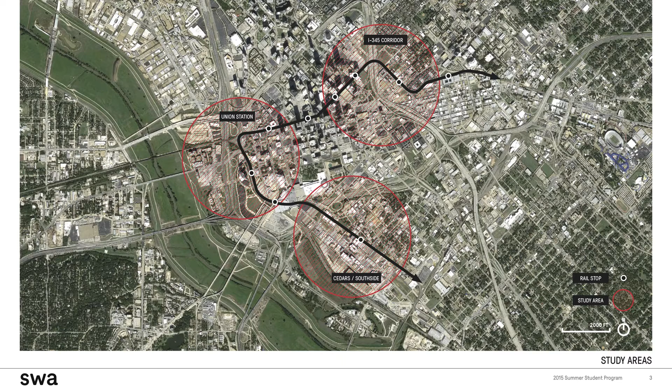Just as a means of introduction to the process, for those of you who aren't aware, we assigned very early on to the students 3 specific sites: the I-345 area, the Union Station area, and Cedars. We asked the students, whether individually or in groups, to really take a look at these sites and understand the physical form, the culture of the place, and some of the sociological, political, financial, economic, and environmental issues of these places.

They began their first week by looking at the city's comprehensive plan, and the second week working in groups to try to apply some of the ideas and thoughts as to what the city could be based on these particular sites.

Then we asked them for weeks 3 and 4 to actually develop a big idea and project this into 100 years or more into the future, so that they could really begin to understand what a 22nd century city might be. And that city for them to study is Dallas, but the idea is that they take away these thoughts and apply this to the cities in which they will be living in over the course of their professional careers.

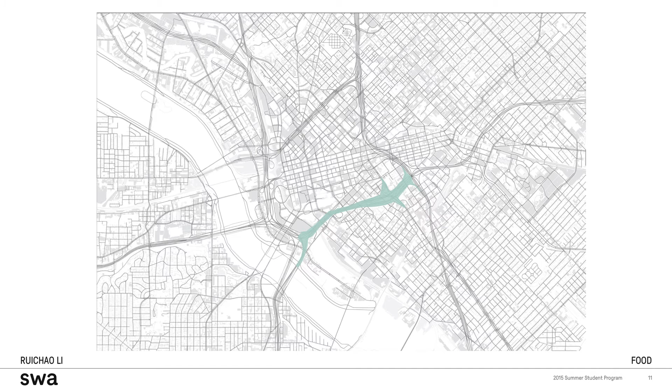So the new proposal is going to create a green infrastructure and move the existing vehicle lanes underground to create a space for food production and for dealing with storm water management as well. Let's zoom into the site.

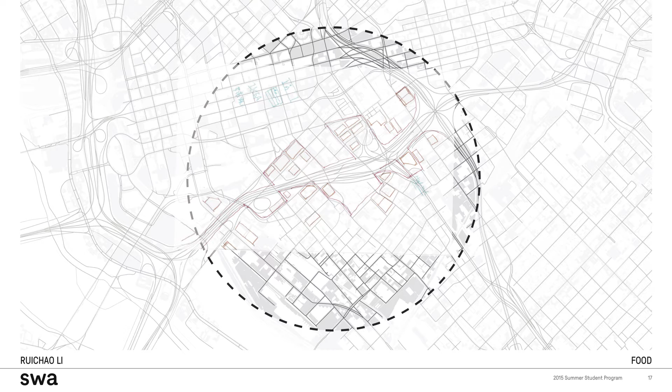In the neighborhood, the important buildings need to be considered, and some existing road systems should be kept to connect the two sites. A linear space will be created to form a green corridor. Underutilized spaces, such as some surface parking lots, will be used for food production, and a water system will come into being.

So here is the existing plan now, and this is the proposal in the future — before and after.

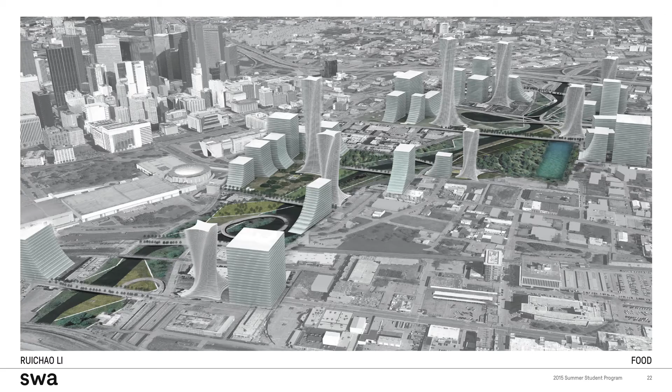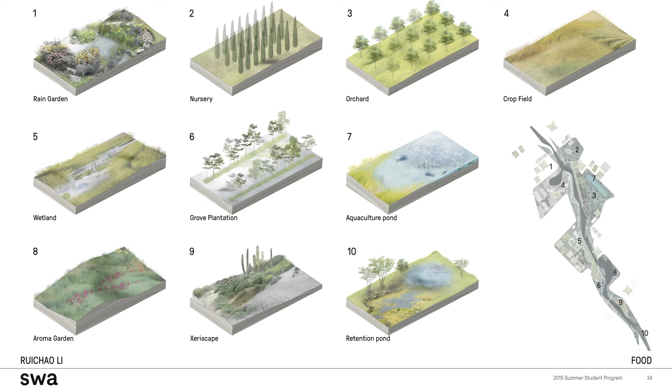So basically there are two elements in the food system. The first one is an agricultural park. Different plantation methods happen here. It's basically a natural museum to show how traditional agriculture works.

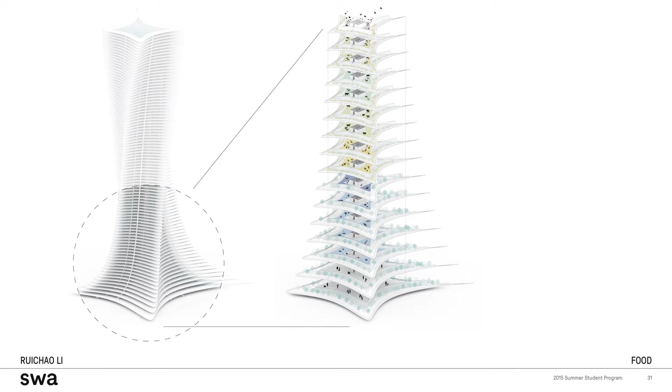At the bottom of the buildings, there will be some orchard on the balcony, aquaculture inside, and cattle and poultry raised here as well. At the top of the buildings, there will be a rainwater collecting system, and wind energy is going to be utilized to make electricity to support the whole building, like to produce the vegetation.

And there's another type of building which is mixed use, with some commercial and residential space, as well as some open space on the roof. There will be some skywalks connecting these buildings so people have access to them, and high technology methods to promote production efficiency and save space as well.

So let's embrace the future — I think it's a win-win strategy for both food production and urban life in the 22nd century. That's it, thank you.

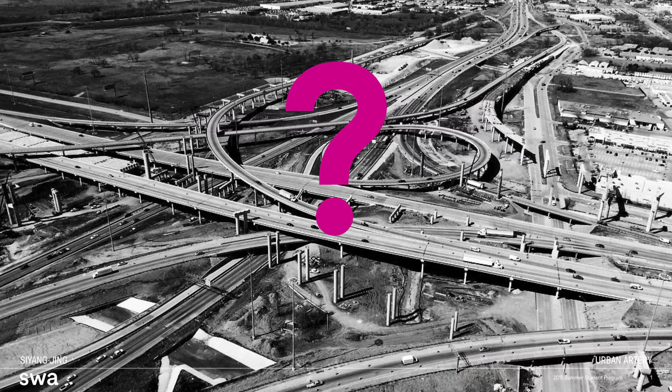My project is Urban Artery, exploring what Dallas will be like in 100 years. My big picture of the future is that land will be extremely limited, and it's a global issue. For Dallas, the transportation corridor is redundant.

Maybe in the future, people won't rely heavily on individual cars, but use more flexible transportation systems, so the areas of the transportation corridor are not of so much use. As you can see, in the existing condition, the transportation corridor contains a huge space, and it's inefficient. But it's an important network that can be the backbone of the city of Dallas.

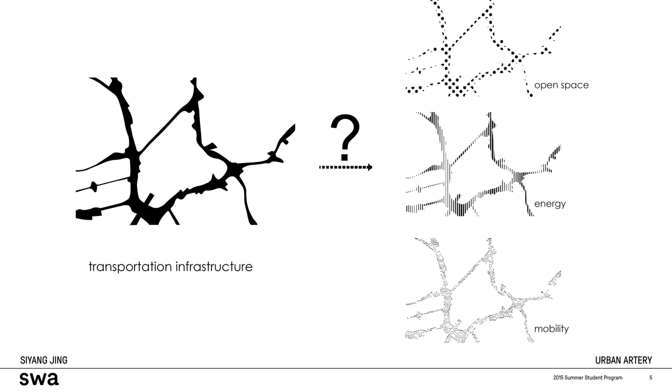So what if we transform this transportation corridor into something totally different that can provide open space, energy, and mobility? Maybe in the future, this corridor is not anymore a barrier, but a soft and social infrastructure that can provide many activities and amenities inside.

So people can, it moves people and touches people. It's like an urban artery that provides the things the city needs to the organs and heart of the city. I see it as providing everything people need in the future of the city.

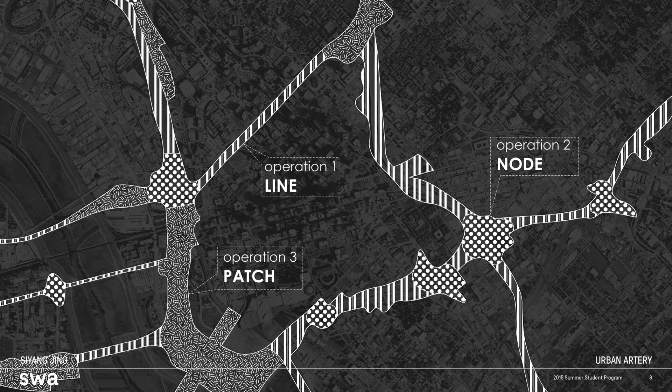Based on the urban artery idea, I categorize the corridor into 3 different operations. Operation 1, line, is kind of a linear area. Node is defined by the intersections. And patch is a thick belt that occupies a lot of area.

Based on those, I'll explain what exactly each operation is. Line is a kinetic system of people, animals, and traffic, and also the distribution of goods, nutrients, and energy.

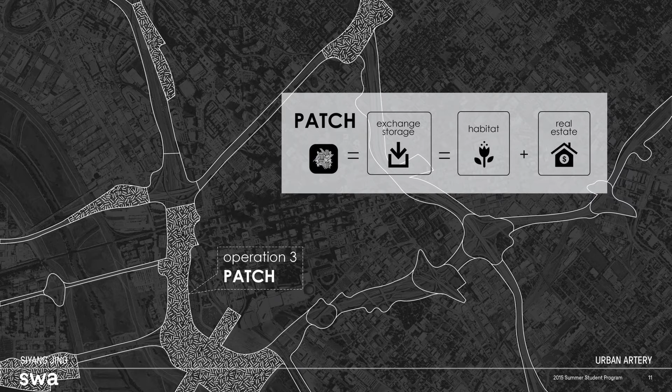Node is a center that congregates all the flows, and it's an area for material processing and energy production. Patch is a thick belt, an area where people can live, work, and have fun, where animal habitats are created and food is cultivated.

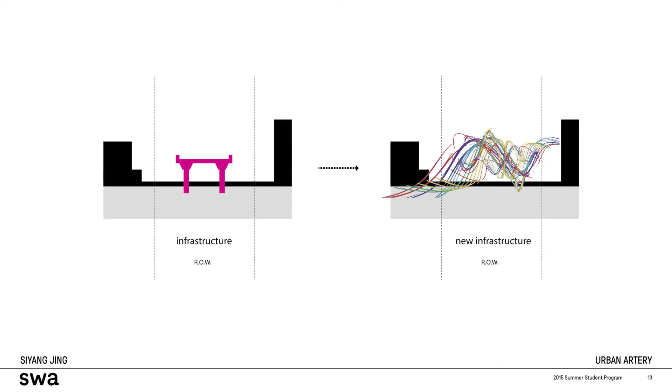I chose 3 typical sites to employ the specific operations, as a physical study of how to transform the freeway infrastructure into new infrastructure and produce spaces within the 3 operations of the site: line, node, and patch.

This is the operation matrix showing how every 2 elements combine with each other, and this is how it looks in 3 dimensions. I'll show them one by one.

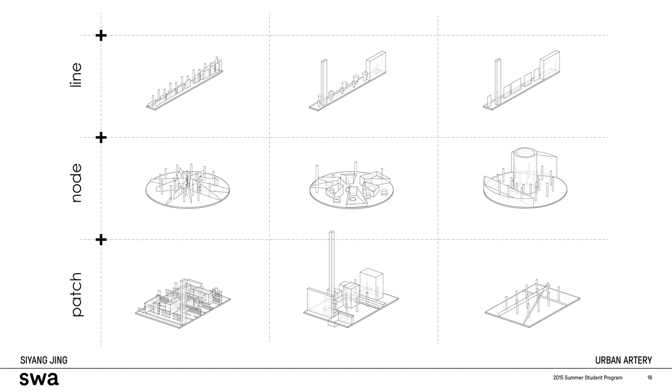This is the line operation, showing the energy distributions within it, and animal migration.

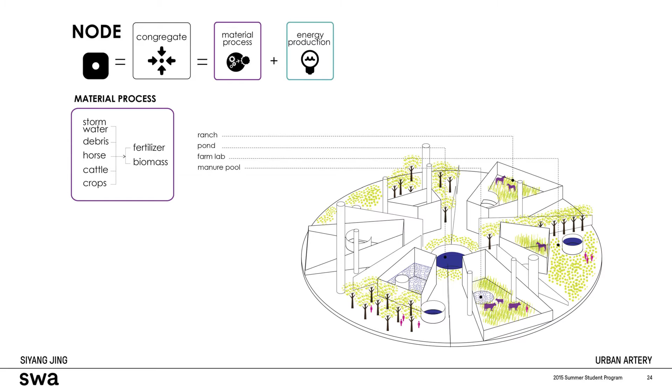And this is operation node, showing material processing and energy production.

And the patch, showing real estate and the habitat.

Because of the importance of open space for people's living environment, the main pedestrian level can be changed to provide various ratios of open space as needed. In the future, this system is flexible and can spur adjacent development. It's a self-sufficient, balanced system.

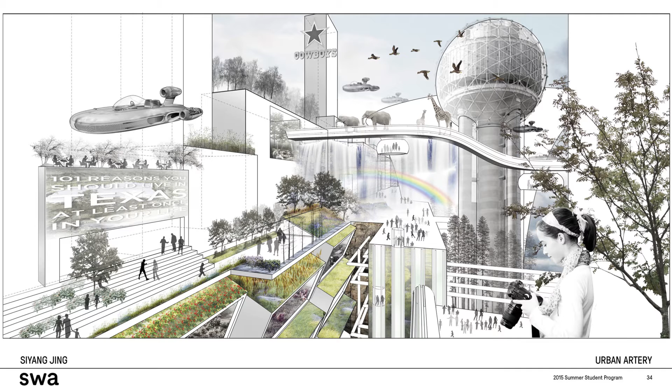This is what the urban artery looks like in the future, and as you can tell, this is the Reunion Tower on the side. So it is functional, but not a dry blanket with futuristic machines.

There are migration corridors here for elephants and giraffes. There are habitats and efficient transportation here, and people can live inside, and it also produces food and energy.

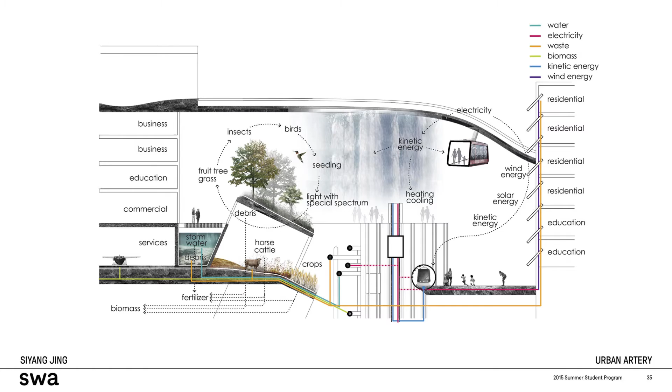This is how the system works, the nutrient flows and energy flows. Over the years, the system takes root and grows into the existing urban fabric.

It is a totally different system, with different mass, scale, form, character, and land use compared to what we know as Dallas today.

So this urban artery is not an independent system, but it's contextually relevant. It has a symbiotic relationship with the heart and organs of the city, and this new connection will play an important role in rebuilding the urban skeleton, adding biodiversity, and enriching people's lives in the future.

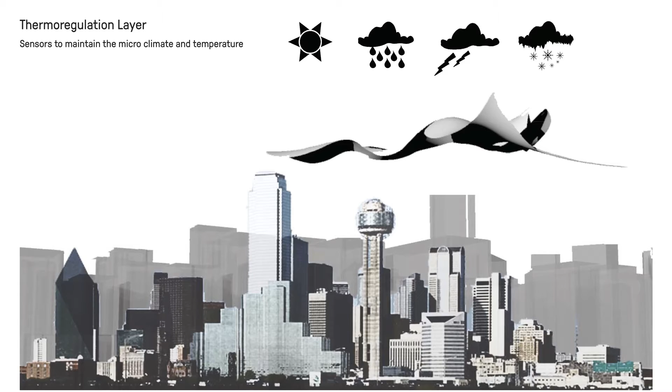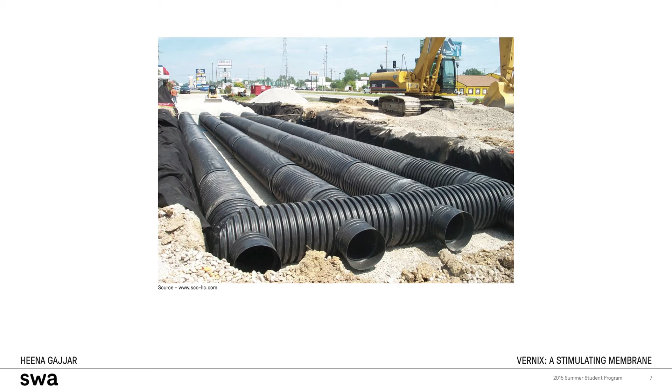This is the infrastructure of energy production today. So again, asking the question, can we bring the synthesis layer to the city, which takes sun, wind, and the natural resources we have, and creates energy for the future. This is the infrastructure of stormwater management, where we collect water in the system and allow it to flow away. So can we have this new storage layer which captures rainwater as well as creates water from humidity, and allows us to use this as a resource?

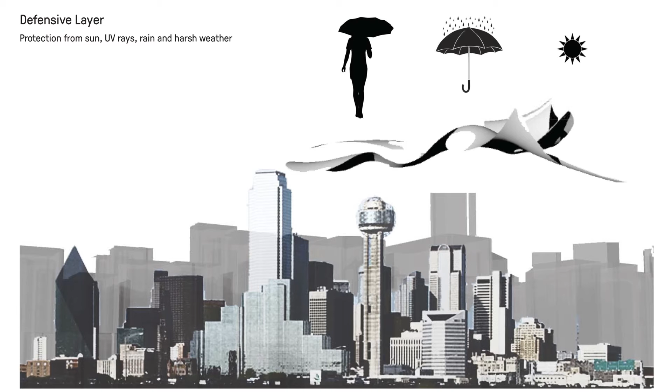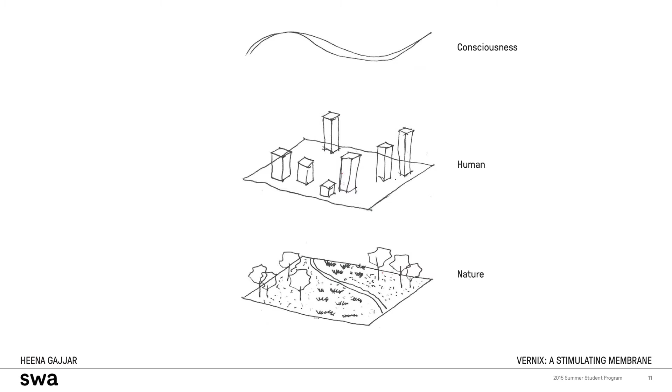And last but not least, the negative impacts of sun, which will of course increase with time. So can we have this defensive layer which protects us from ultraviolet and other harmful radiations we will face in future? So basically, understanding this new matrix where we have nature, then our cities as a human intervention, and then asking, can we have this layer of consciousness which is very similar to human skin? So it's a defensive layer, a thermoregulative layer, as well as a synthesis layer, pretty much similar to what our human skin does.

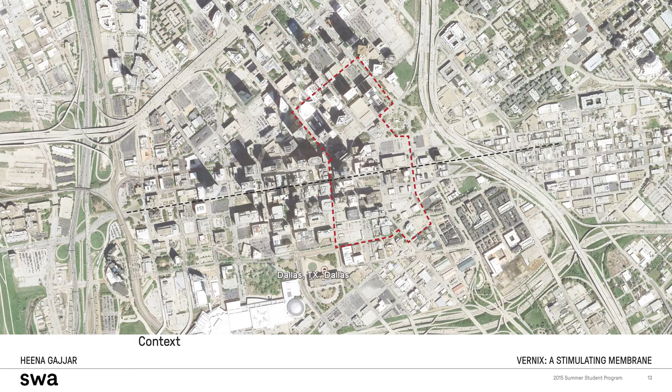In terms of context, I chose my site in the heart of downtown. It's an area with a lot of parking lots, where I envision new buildings coming up. And again, taking the assumption that we are converting the main street into a pedestrian street, which connects downtown with Deep Ellum.

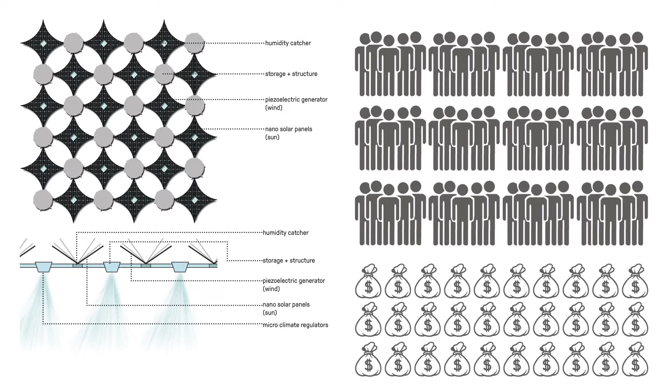In terms of going into detail how the skin would function, it has all these aspects of humidity catcher, storage and structure, using wind and sun, and creating this layer. Basically, this is building a new public-private relationship where private dollars are invested in creating and maintaining the skin, but it is applied to these open spaces—in the public realm, basically.

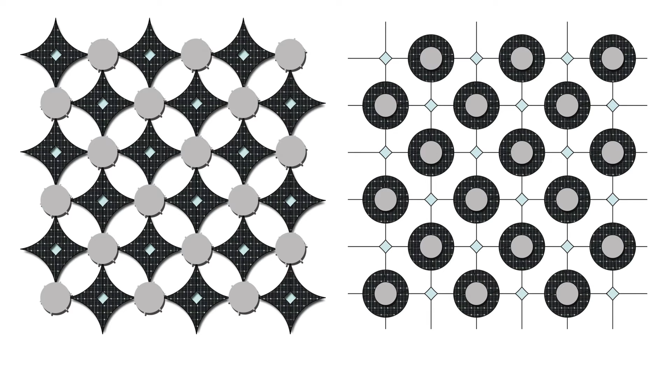Going to understand the pattern of the module—this is the individual module, which looks like this, and when it is closed at night, it looks like that. It's inspired by the Hoberman switch pitch ball. So during the day it would be like this, and during night it would be something like that. Because this is a dynamic skin, not necessarily the whole skin needs to function in terms of all three given functions—so some part of the skin would function differently during some part of the day.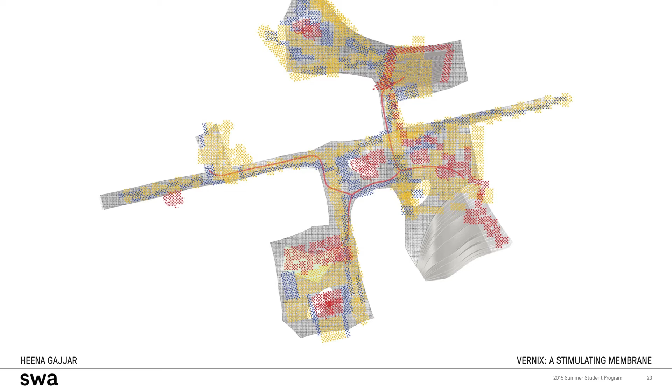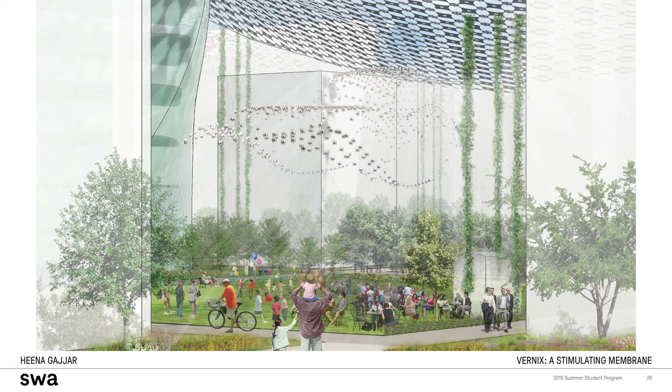So this is what the insertion of the skin in this urban infrastructure would look like, where new buildings come up with their landscape on top, while the skin integrates and becomes the building which merges into the landscape, and the landscape grows over the skin connecting into these spaces. This shows the view of how the building looks and merges with the skin and landscape, and this is what it would be like to be under the skin. So basically, it connects people and brings energy, everything into one place, collaborating them all together.

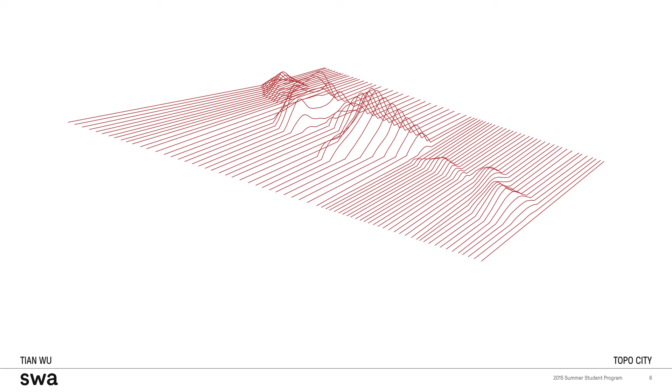This is the existing water drain system. I tried to analyze it and create a new stream water system, making the stream water system flow more consistently. I overlaid the existing street grid to get these new shape forms, which bring in the surrounding conditions and a connection to the city.

This also gives additional function to the building construction, such as solar panels to collect solar energy, green roofs that can capture and filter water, and courtyards that can capture skylight—plus vertical, mixed use of the building for different types of programs.

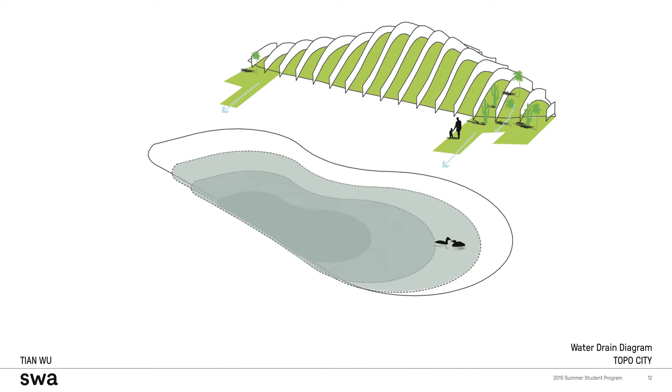These diagrams show how the water drains through the terrace structure and eventually goes down to the low point, making its own way to the river. This section shows a comparison of the dynamic way this compares to current Dallas.

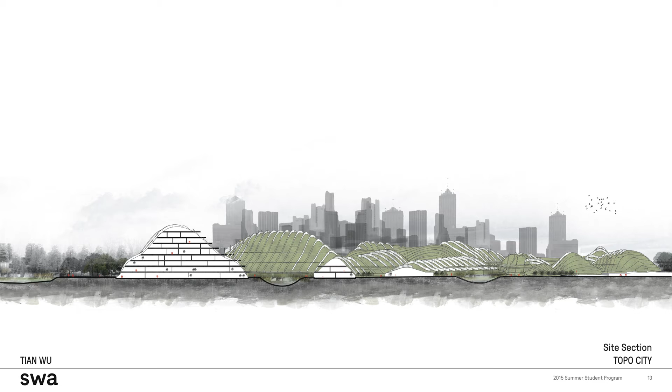So this experience, when people walk through this site, they can have a very different view of the city, and also have the view to the river. So I've created this very strong visual and physical connection between the city and the river. And also the green roof can create a very natural sense for the future residents who live there.

And also, like the diagram shows, how the structure captures the water and reuses it for daily life. And in the daytime, how they keep capturing green energy.

So I think I created this new form to redefine how landscape architecture looks in the 22nd century, and to create this very livable environment for people. Yes, thank you.

Arturo: All right, this is an area of town that we've been doing a lot of work in over the last couple of years, trying to reimagine the rebirth of the Cedars. The Cedars at one point was a very vibrant community that got displaced over the years by industrial uses.

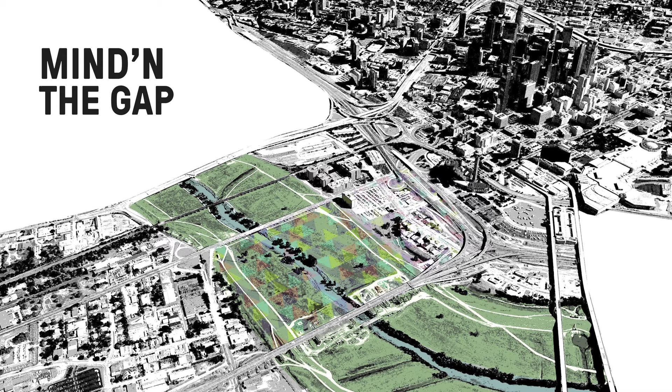The 22nd century will obviously be formed by things that we have done in the past and things we're doing today. A lot of trends we're seeing today are increased development in downtown and especially in the districts around downtown, including West Dallas. So in the near future, Dallas will definitely be mindful of the gap when they think about developing that area.

So in the 22nd century, Dallas will address the riverfront as a development opportunity and transform it into the epicenter of a new downtown. By taking the riverfront, and instead of building to it, building through it, we can connect two different places and make it potentially a new downtown area, maybe the first of its kind for Dallas.

This area will also be a synergy of the built and natural environment, because in the future places won't just serve one purpose—it'll be a culmination of multiple uses happening at once. So the riverfront will no longer just be an open park space; it'll also be an urban living environment for people to live and work there.

So here is the context of Dallas. We all know this, the freeway system. Being an outsider coming into this city, it's very obvious that Dallas is a car-oriented city, and this is one of the major connections that connects people throughout Dallas. You can see in the center here that the core of downtown is bound by the freeway system.

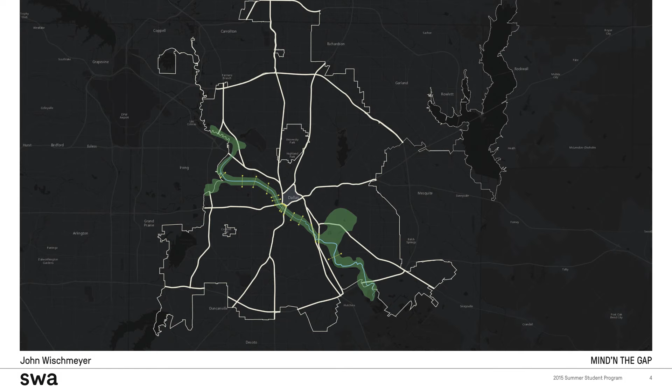But something people don't think about too much is the Trinity River corridor system that runs through Dallas as well. This is going to be a huge amenity in the future that we're maybe not thinking about so much today. These yellow lines are the links that connect both sides of the corridor. This idea reinforces the notion that the corridor is something to just go over or pass over, not really spend any time in or give much thought to.

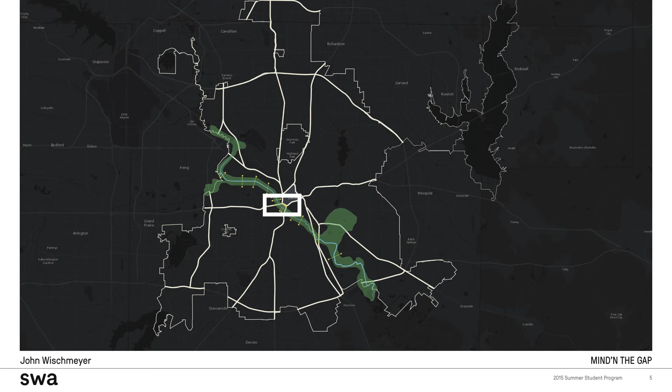Right here towards the urban core, we can see that there are multiple connections. So this is a curious spot, and I wanted to look further into connecting an area in this zone.

So here we have present-day Dallas. We can see the freeway system binding, encircling the downtown. It's disconnected from the riverfront, and it also speaks to how we think about development at the riverfront today. Here we have a jail, we have surface parking, and we have the freeway system. So the riverfront is really not a place that is desirable for development today, but I think in the future it will be.

So in the next 50 years, a lot of development is going to happen. We're going to have better technology. We're going to have developers who want to get a lot of things built. And in Dallas, there seems to be unrestricted building codes, so a lot can happen in a little amount of time.

And so we're going to see the downtown creep closer and closer to the riverfront. And we're also going to see West Dallas get closer and closer to the riverfront. But what's important is the space in between these two areas, the riverfront.

I'm also imagining that in the future, because of all of this increased development, that Dallas will probably implement a growth boundary. This line you see right here is what I'm imagining to be the new growth boundary so that Dallas can expand. But I don't see it expanding around here. I see it expanding further away because that land is easier to develop.

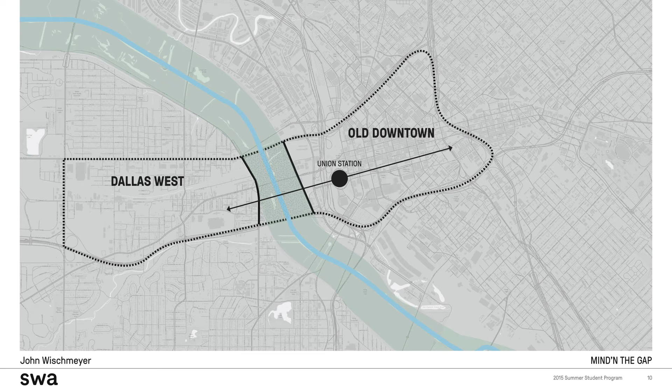Also in the future, Union Station is probably going to be a really important node in Dallas. It's predicted that it will be the station for high-speed rail, bringing people from out of state, from other cities, and even maybe a central point for people who commute through Dallas. Having this node on axis with this portion of the riverfront, I feel is very important.

And so this is why I'm looking at this area for potential development. To achieve this, I'm looking at 5 strategies. The first is to re-engineer the Trinity River, which will in turn shape how the topography and land form around it. Looking at different building typologies, creating open space, and then connecting all of this from West Dallas to downtown and through the riverfront.

So this is what we have today. As many of you know, the river was engineered to look like this. It was moved about a mile from its original location, and it's primarily serving a function. It's not so great to look at, and it's really not, from my experience, highly used.

So I did a study of looking at natural river meanders and just looking at the spaces and shapes that forming the land differently can give us. And so this is an idea that I came up with. This could be potentially the new Trinity River that runs through the riverfront next to downtown.

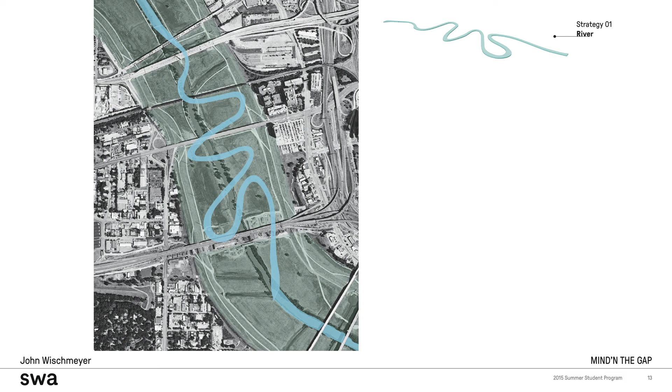And so looking at these curves, I decided that the land should be more dynamic. By pushing and pulling the land to create landforms, the gray forms are brought up to reinforce the natural curve of the river, and the dark gray are depressions so that in flooding events they could potentially become wetlands and future park space.

Looking at building typologies, in this scenario the typologies are formed by the land they're in. Buildings in the depression areas would deal with water and other natural events a certain way, so they'd all have a certain form, and buildings on higher land would follow the same logic with a different form.

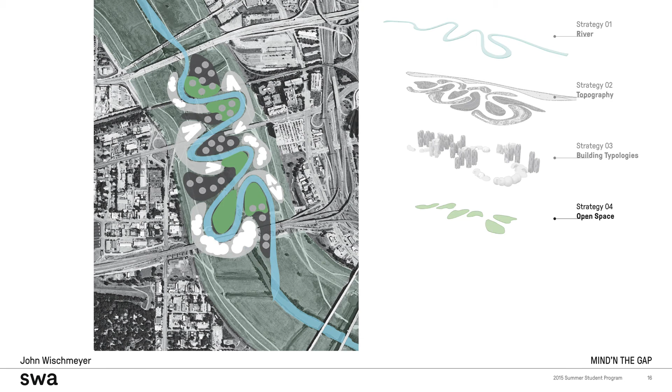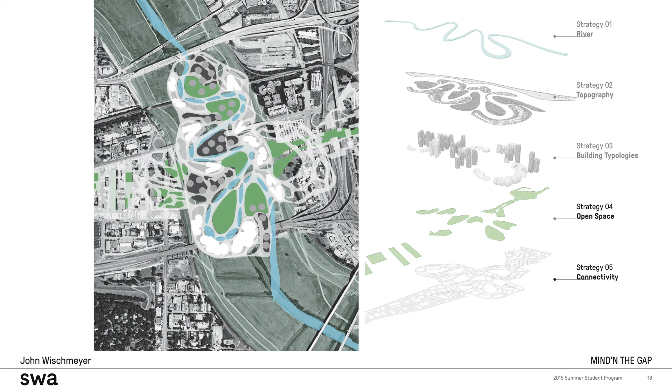Then creating a connected park space that runs through the center of this system, and connecting everything with a surface I'm calling the people plane, which connects downtown and West Dallas through the riverfront on a pedestrian-only plane. It connects the buildings and both sides of the river, allowing people access down to the riverfront, but it's not just about the riverfront, it's about connecting these two systems, so the park space and pedestrian plane finger out into both sides.

Looking at this in section, we see this stretch of riverfront between West Dallas and what I'm calling Old Downtown is about a half mile of flat open space. During flooding events the water rises and it's very functional, people can still cross using the multiple bridges we have. But my proposal drastically changes this topography, giving people a wider variety of ways to interact with the riverfront while staying connected, so that during flooding events this space is still activated by this plane.

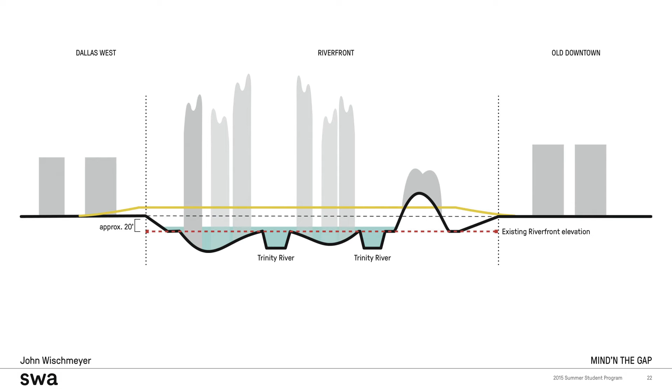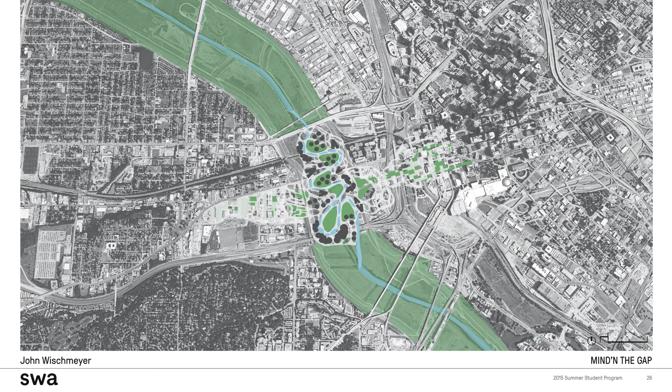Looking at a site plan, we have this proposed site connecting the corridor, linking to both sides of the river. Thank you for minding the gap—this square here is about half a mile by half a mile, a fairly small space, but it shows that even a small area in the future could make a really big change for the way people live in Dallas. Thank you.

I want to start by saying I really like all the information you gave leading up to the reason why you chose this site. You have a really clear visual aesthetic that distills down the information to help tell your story incredibly well, so much so that looking at your perspectives and drawings I'm starting to see Dallas in a slightly different light, which is quite impressive.

I really like that you chose the river bottom itself, because intuition would say no, you wouldn't build on the river, it's a natural resource. But I think there's also this reality that the potential of growth and expansion will require us to have some plan of action for developing everywhere.

I think you've done quite a nice and sensitive job—yes, you're re-engineering something that's already been re-engineered, but you're building in parks and engagement at the human level across multiple sectional scales and buildings. I think it gives the correct mindset for planning ahead for the future. And it's different—everything is curving, all the buildings are curving, and it is a bit visionary. It's not just downtown sweeping over a river and leaving it behind; it's truly a nice integration of what both our natural and built landscapes could look like. So well done.

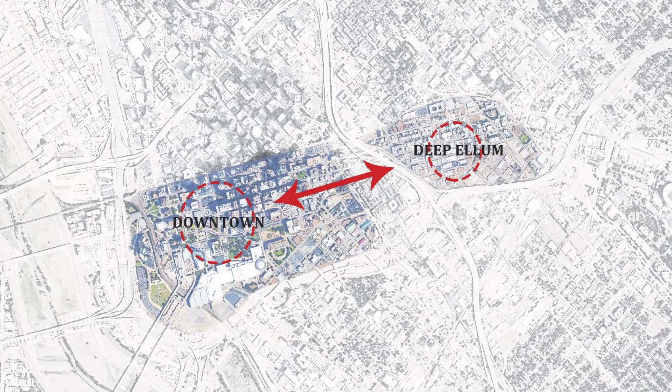My project name is Healing Web, and I'll tell you later why. So first of all, the starting point is to connect the city, and more important is to connect downtown to Deep Ellum, because I strongly believe that downtown will expand towards Deep Ellum in terms of following the existing grid. And what is preventing this? Scars. With scars, I mean the wounds left by this car-centric era in the last 100 years. And the point is how we're going to heal the wounds left by this.

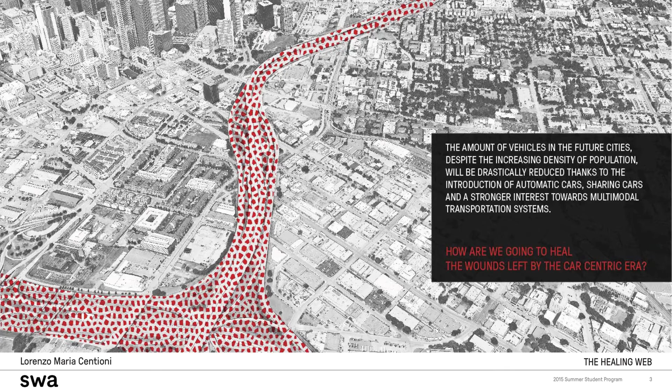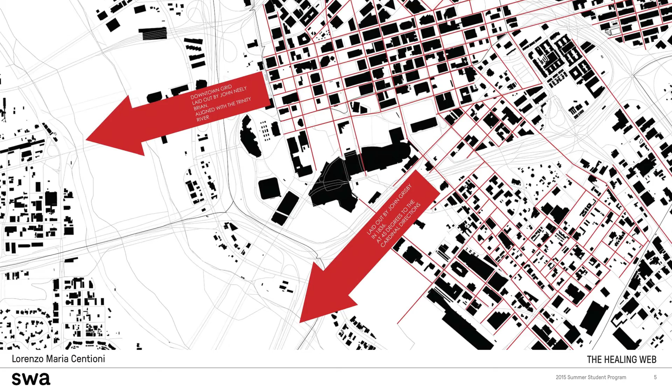Probably that could be taking advantage of the existing space left by the previous planning. With this, I really mean the highway, so the space left by the highway, which is not utilized at all now. So the area of focus is this area here, which I think is really important because it's the central point of these two existing grids. I don't know if you can read here, but this grid here is the one aligned with the Trinity River, and this grid here is from 1836 and is 45 degrees with the cardinal direction. So this point here is a really messy point in terms of urban design and street layout.

So this is my impression as a European student of downtown here. What I would say is that, of course, there's few people along the streets, not enough tree lines, green spaces. It's an automobile-centric city, and there's a lack of entertainment, retail shops, bar clubs. Could the tunnel system be the right solution? In my opinion, I don't think so, but we will see. And then another feature is that there's a huge amount of car parking.

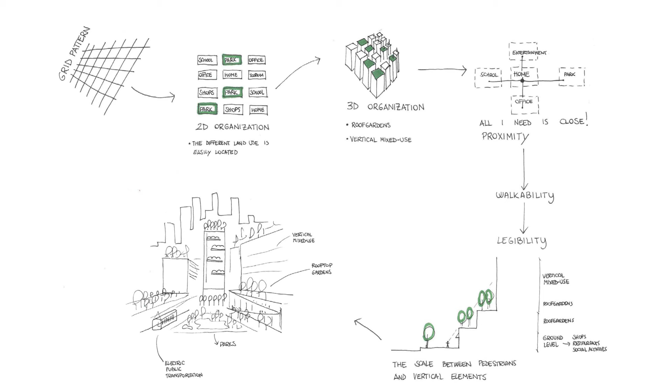Another interesting point for this area that made me choose this is that I strongly believe the grid pattern, the grid layout, is a really strong point for the future, because the grid was made like 100 years ago, and we still have it. So why not keep on having this layout? I'm talking about the streets. As you can see, what you can have is proximity, walkability, legibility, and this organization can also be three-dimensional. For example, parks can also be rooftop gardens, and you can duplicate this idea of having everything really close. So if this is home, you have park, office, entertainment, everything really close.

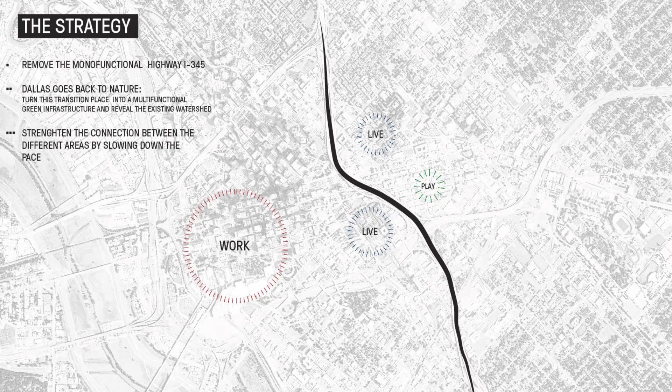The objectives, the main aim of this project, is to bring back people to downtown, and this can happen by bringing back green spaces, restaurants, retail shops, tourist attractions, and schools. The strategy is based on three main points. The first one is removing the highway I-345. The second one is that Dallas has to go back to nature, and that means I want to turn this transition place into a multifunctional green infrastructure.

And then the third point would be strengthen the connection between the different areas, slowing down the pace. So the first point, you might ask, where are you going to put all the cars in the future when the density will be much more than now?

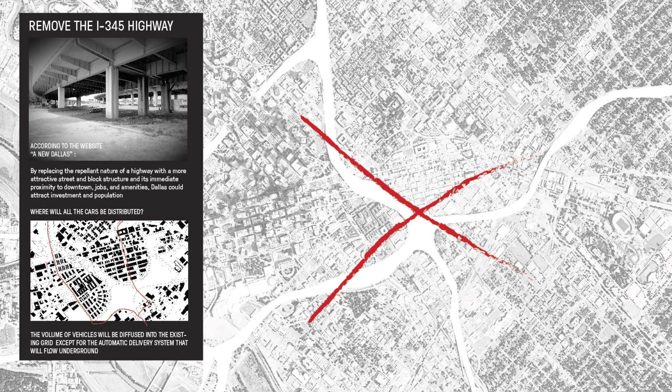So the idea is to diffuse the vehicle amount in the existing grid and also create some other streets that I will show you in a couple of slides. My assumption is that with automatic cars and sharing cars, the total amount of vehicles will be less than now.

Second point, as I said, Dallas has to go back to nature. When we made the second week group, we were talking about revealing the existing watershed, which is a natural low point of the land where Dallas is. By excavating this, we can create this low point and green infrastructure connected to the Trinity River watershed, which is really important.

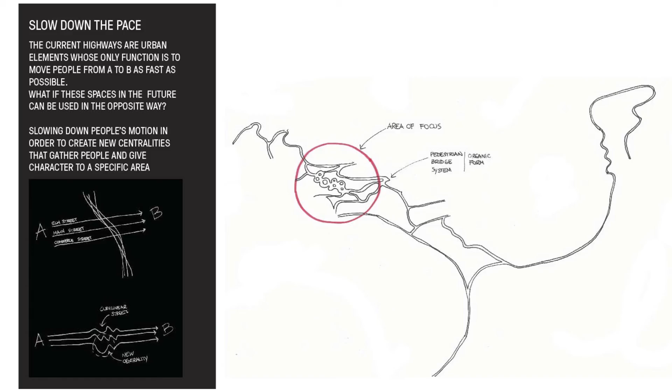Third point is slowing down the pace. That means now, for example, if I want to move from downtown to Deep Ellum, I just go through linear streets like Commerce Street, Main Street, and Elm Street. This is monofunctional, having just one function, connecting people, connecting A to B. So we are not caring about the space.

Assuming we can create some curvilinear streets that automatically create some kind of centralities, that's what I'm aiming for. And that's the plan view of the green infrastructure, but let's see it in detail.

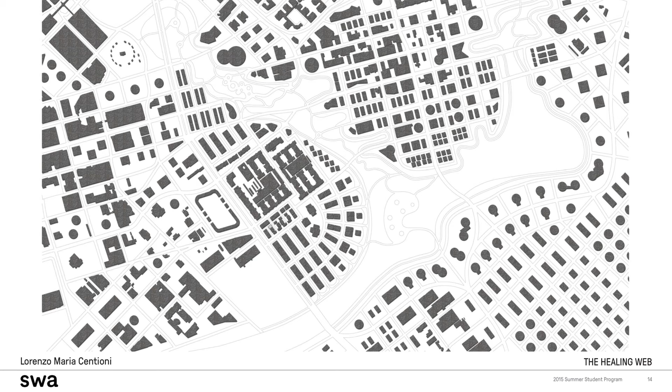This diagram is a map showing the difference between the built environment and the open space with streets included, and I shaped this new part of the city that didn't exist before. What's important is that before, the highway was disconnecting the city, and now this green infrastructure, substituting the highway, is actually creating land and giving form to the city.

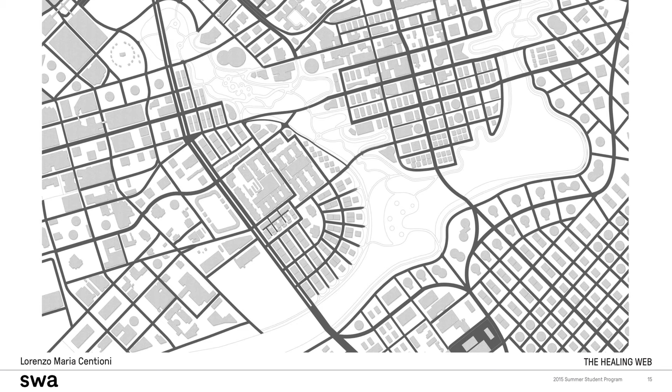And this is the street layout. If this is the previous track of the highway, the streets can now be something like this, connecting and diffusing the vehicles through the grid. So this is the lowest point of this green infrastructure.

As you can see, this is a little water stream, and the more I move, the more it goes up. For example, if we have floods here, this could be another layer with retaining ponds, creating other kinds of activities—this one here is the farmer's market. The last layer, the upper one, is just open spaces that really connect this green infrastructure into the existing city, into the existing grid.

Last but not least, this is the pedestrian web. You might think this green infrastructure could be something nice because it's green and blue, but it could actually disconnect the city. My idea is really that we have to connect people and create these new centralities with this web of connection and bridges.

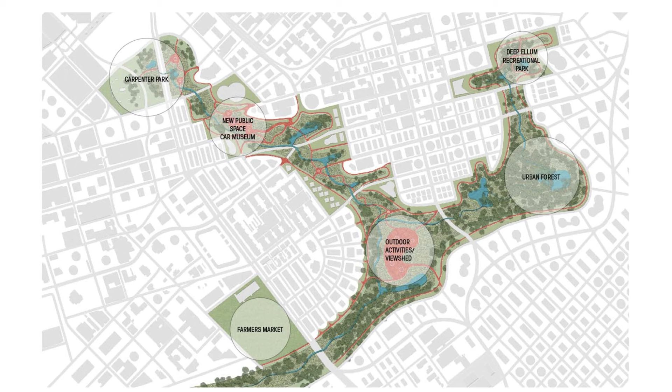And these are some activities. The idea was to connect Carpenter Park to Farmers Market. This could be, for example, an urban forest, and I'd like to have some kind of end point of this path that starts from downtown to Deep Ellum, so we could have some kind of recreational park there. This is going to be the area I will focus on in the next slides, which is this new public space.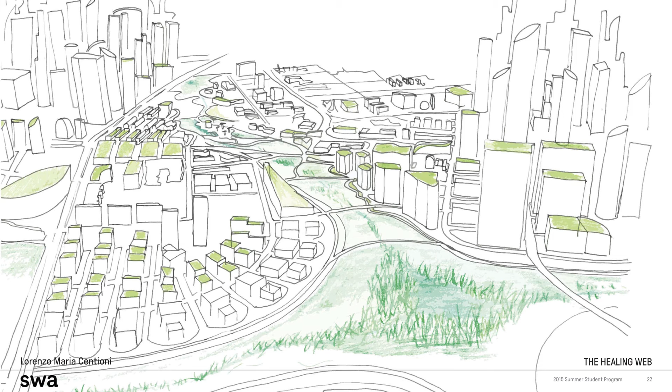And here's the render. Another feature is this new typology of building that steps back with green rooftops. For example, who lives here still has this kind of connection with the green infrastructure, so you don't have the view covered by another high building, but you have these green stairs that bring you visually down to the ground level.

And last but not least, I would say is to giving character to this area. So this is a sketch of the view of downtown, and this is the core area of this pedestrian web.

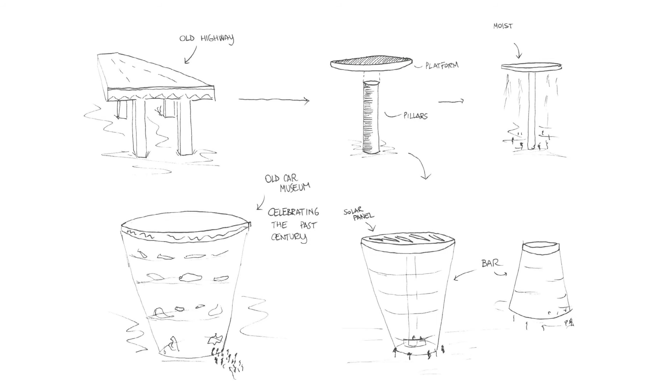Okay, so why not keeping some part of the highway, some portion of the highway to create some new urban design elements? For example, if this is the old highway, this could be some pillars, and we can apply some kind of platforms and create new elements. For example, this can provide some mist, or could be used with solar panels to have some bars, restaurants, and bring back some activities to the city.

And why not having an old car museum? So why not having cars in museums in the next 100 years to celebrate the past century? And yeah, this is another view of this area.

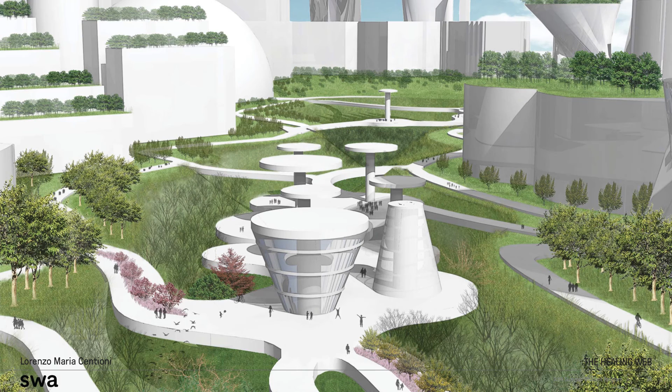As you can see here, this web actually overlays this green infrastructure that goes into the natural watershed. This is a render that shows the quality of the urban environment, because I really believe that we need to make people go in there, and there has to be something with character, something that makes this part of the city different from other areas.

And this could be, for example, as I said before, this Jurassic parking, or wherever it is. And yeah, thank you.

You know, I love the idea of the old car museum, and I can't help but think that's like, you see these videos online, and I have a 6-year-old son, and when he sees a rotary telephone, he just doesn't understand it, right? And when you think where a car has come in 100 years, and 100 years further down the line, we may see the same reaction with people walking through, like, what is that, Dad?

There's something about the scale that you've created here that feels right. And I've seen a lot of people look at what could happen when you take this highway down and how you infill that. To me, the scale is very important for that part, because you're trying to amplify a connection, and it's a connection that's there, it's just hindered. I do think that's one of the most important parts of the city that is unfortunately so severed.

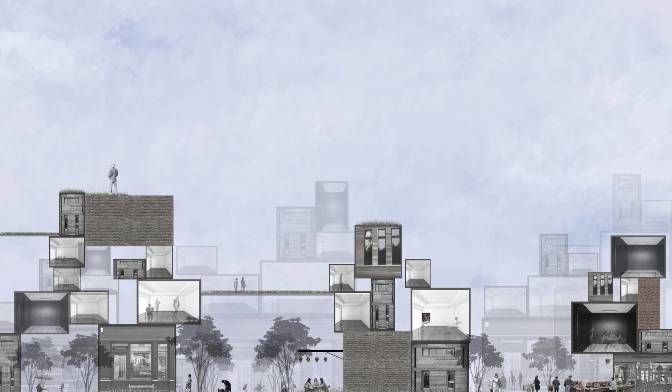Okay, so our society is facing changing social, climatic, and economic conditions, and currently our cities are not able to move fast enough to accommodate these changes. I believe that as we move into the 22nd century, it will be imperative that we design our cities so they can be responsive to change at multiple scales: the scale of the pedestrian, but also the scale of the city in the face of natural disaster. I also believe there will be a strong desire for people to connect with other people, with the materials they consume, and with their environment.

I am proposing to turn Cedars into a movable district that is adaptable in form and function. The architecture will be constructed of movable units, and the small scale of these units and of the block will create a strong pedestrian realm, which will create a stronger sense of connection and community, which I think is really important and something we're currently missing.

So I chose the Cedars District for three reasons: the strong artistic community that's there, the proximity to the river, and also its potential as a clean slate. As mentioned before, Cedars has a lot of old, irrelevant industrial buildings and a lot of vacancy, so it seemed like a good site for a new project.

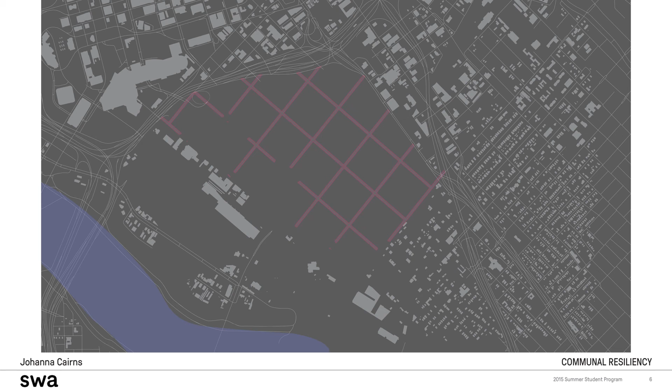So the beginning of this design starts with a network of fixed vehicular roads and flexible pedestrian streets. As you can see, the grid is tight and more rigid the further away it is from the river, and as you move towards the river, it begins to disintegrate. This is to create a diversity of urban experience and also greater flexibility in the face of climate change.

The network of buildings plug into the grid, and for optimal walkability, I've defined a half-mile radius circle to define 3 smaller villages within this village, or within this district.

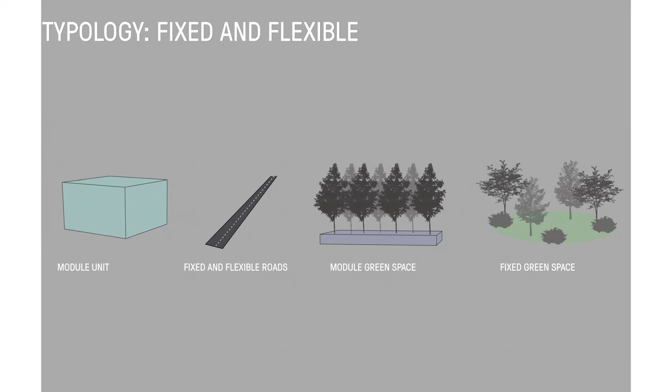So the design has 4 main components: flexible module units, fixed and flexible roads, modular green spaces, and fixed green spaces. For the optimal pedestrian experience, I've constrained each block by 150 feet and 150 feet, and these dimensions are actually taken from the Forbidden City in Beijing.

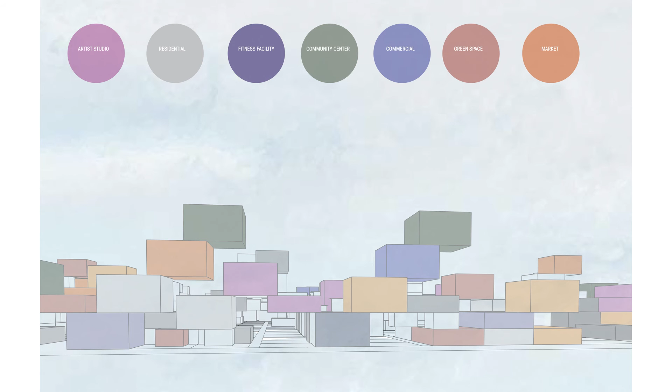As I mentioned before, there are 3 villages that are defined by half-mile radius. And for optimal walkability, we have all of the programmatic elements that would be necessary within each of those half-mile radiuses.

This is a shifting grid that's demonstrated through Legos that talks about the horizontal and vertical planes. As you can see, the grid is shifting on the horizontal, and it begins to start to stack vertically. I think that this stacking can create the potential for multiple levels of pedestrian life. And as our cities become more dense, I think this sort of use and taking advantage of the vertical will be more and more important.

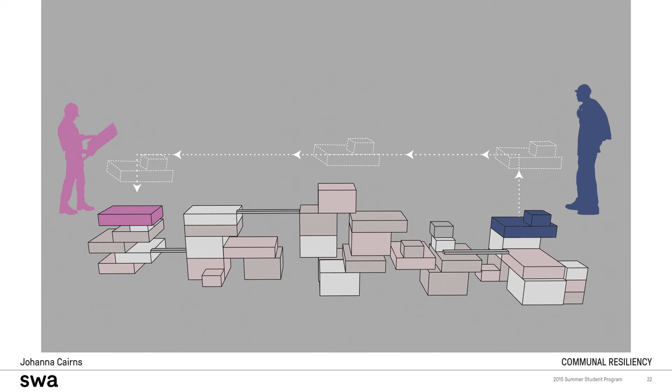So there's many scenarios in which this grid might shift, and one of them is a collaboration-based shift. The modular units will allow for physical connections between artists, materials, and production industries to connect physically.

There's also larger programmatic shifts. As the community evolves over time, they might decide that different urban designs will be required. In this succession, you see the community choosing different green space schemes.

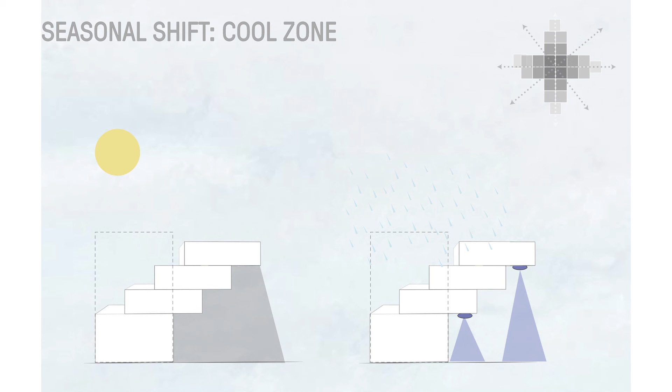Another shift is based on microclimate. We often talk about Dallas and how cold or how hot it is, and what I'm proposing is to create a really strong pedestrian realm, and the question is, how will we stand the heat? So I think that these movable units can actually be used to create microclimates. Movable units could shift in the horizontal plane to create shade, or they could catch the water and create water cooling systems. In the cooler season, the buildings could stack vertically and create more sun exposed to the pedestrian realm, or create clusters for warmth.

This is a plan view of the seasonal change. You see the stackable formation, the horizontal formation. And I think that these microclimates will be very necessary for an enjoyable pedestrian experience in Dallas particularly.

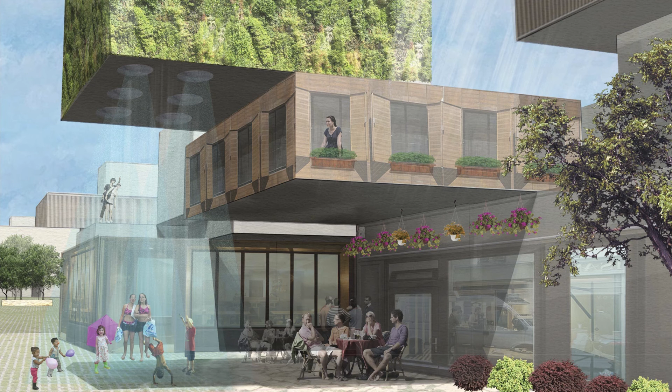So what I've described so far is a lot of flexibility. And I've also talked about that it's essential that these forms serve to basically support a strong sense of community in place. And because of this flexible system, you have to have fixed elements that anchor this in a sense of identity, place, memory. So here's an example of one scenario.

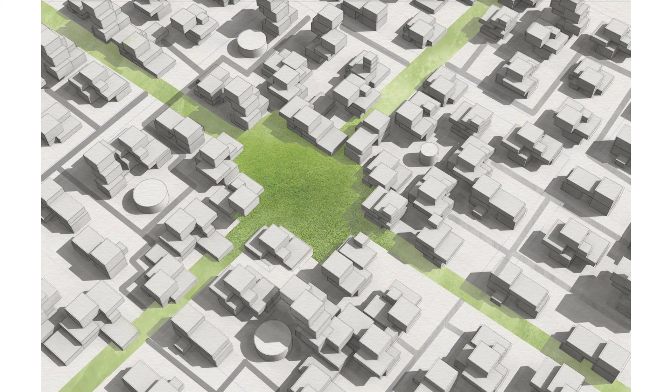In this scenario, the community central green is fixed. This is a place that people can go to, their children will go to, and when they're 20 years, 50 years old, this will still be here. You have trees that are planted and rooted in this central space. There maybe are historical buildings that the community has decided are important, and the units have formed around these buildings.

Residents have settled around the central community space, and there are also community buildings that are shared. These are facilities that produce products that are special to this neighborhood. And finally, cafes and restaurants have populated the central green.

So, in conclusion, I think that too often the physical form of our city prevents us from changing. It also can keep us in stagnant cycles that no longer serve our society, like institutionalized segregation, vehicle centrality, or we can become victims of environmental degradation. I think this modular system can keep us flexible and responsive at multiple scales. Thank you.

You know, what a beautiful, sympathetic response to so many of the issues that we have in an urban environment today.

It's a very captivating idea, and I think to me the most interesting thing about it, and this may come from your dance background and thinking musically when you design, is the temporal nature of this. And I love that the rhythm and the speed of the change is going to ebb and flow based on what the people are doing and what's important at the time, and that's going to differ from the fixed elements of the city next to it.

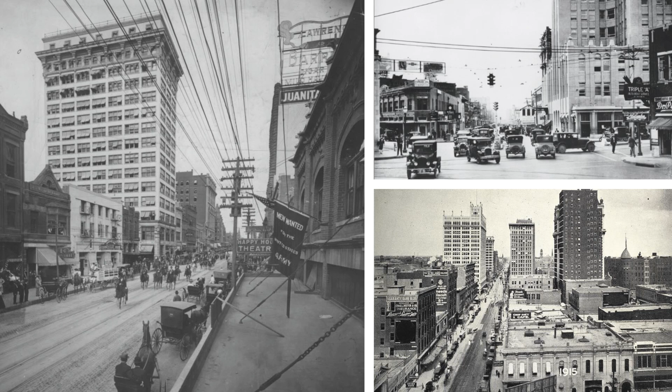But we're not vacant, and we're not empty, and we're dynamic, and we're designers, and we're residents of the city, and we love our place, and we really envision something else. And you can see the old mapping.

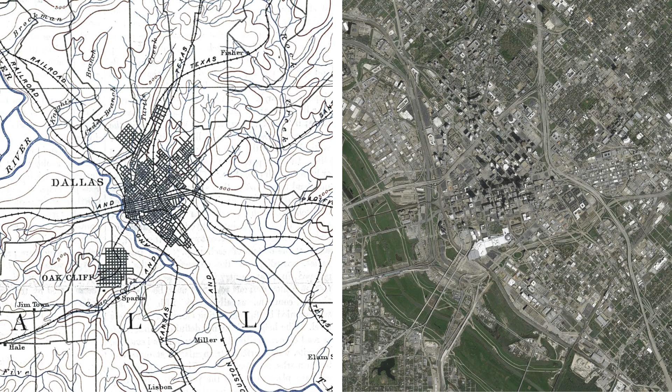These students worked with discretion and on their own for the last 2 weeks, but were actually speaking to one another, sharing their ideas and influencing one another's. Ultimately, we end up with a product that feels like it could be a living system for a city, potentially in the future. So that concludes our presentation.

Oh, sorry. Oh, yeah, go ahead.

As someone who has been involved in this SWA program for more than 20 years, I think Joe summarized it in the best way I can ever remember someone summarizing, when she proposed her thesis at the end of week 2 or the beginning of week 3. She said, 'I would like to ask you just for a moment to suspend what you understand as reality.' I think that's the essence of our program — this is future thinking and future world.

I, for one, don't feel so worried about Dallas or the world after spending time with students that we do every year, because I realize there's really young but brilliant thinking going on out there. I look forward to my great-great-great-grandchildren living in a world that maybe is better as a result of these types of experiences. I think Dallas likes to think of itself as a world-class city — I'm not sure that it really is, but I think it can be, based upon this type of thinking.